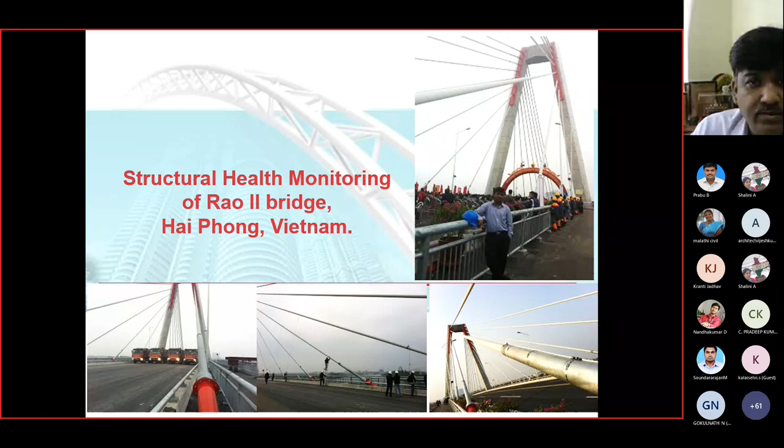Now, a few of the projects I've been involved in the earlier days are the structural health monitoring of Rao II Bridge in Vietnam, and the online monitoring for the Golden Horn Bay crossing in Russia.

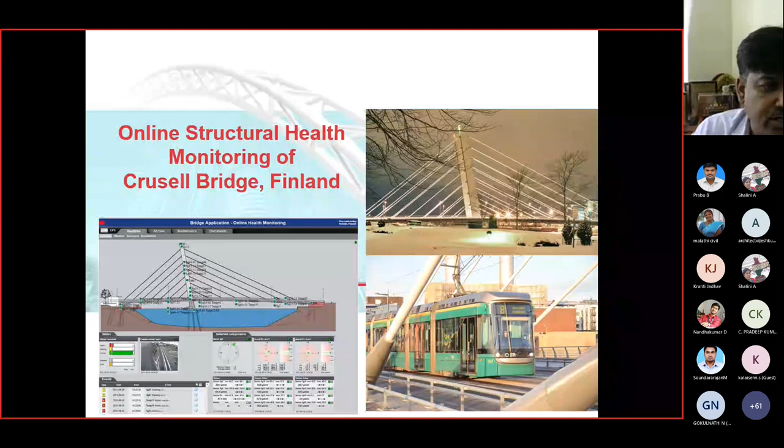Then online monitoring of the Neva Cable Stay Bridge in St. Petersburg, Russia, and the new Mariinsky Theater in St. Petersburg, Russia, one of the largest theaters. And the online structural health monitoring of a Crusell bridge, which I will try to present today as a case study if time permits.

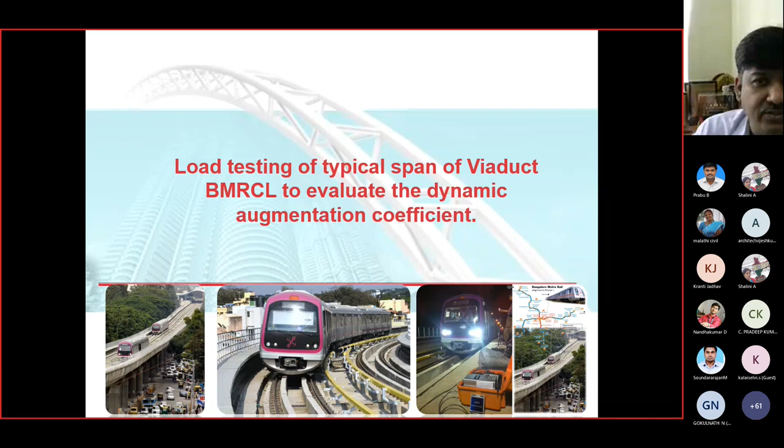Then some load testings have been conducted in various bridges, and a few to name is the viaduct of BMRCL, to evaluate the dynamic augmentation coefficient.

Then the vibration monitoring of various industrial buildings for various reasons, only a few quite interesting to present, to develop the business as well as be knowledgeable about where things would fail. So I've taken only a few. This is vibration monitoring of an industrial building.

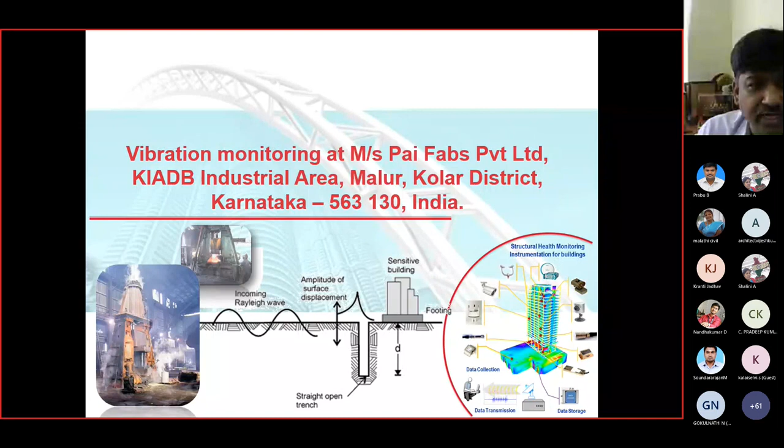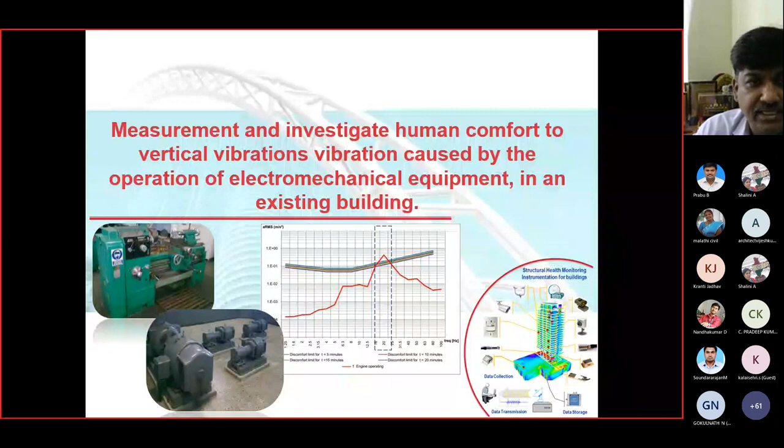And some studies which we have supported indirectly or subcontracted, on the measurement and investigation of human comfort to vertical vibrations caused by electromechanical equipment for various buildings. This is one of the case studies that is quite interesting.

Then we have done a lot of support to research candidates who would like to do research on something related to sensors and sensor-based vibration damage detection techniques, that is forced and free vibration of latex modified fiber reinforced prestressed sleepers, which we conducted at Bangalore University, where we were the supporting team.

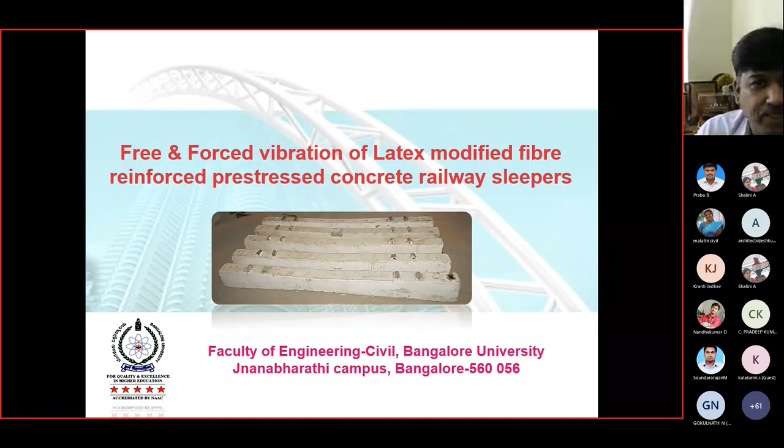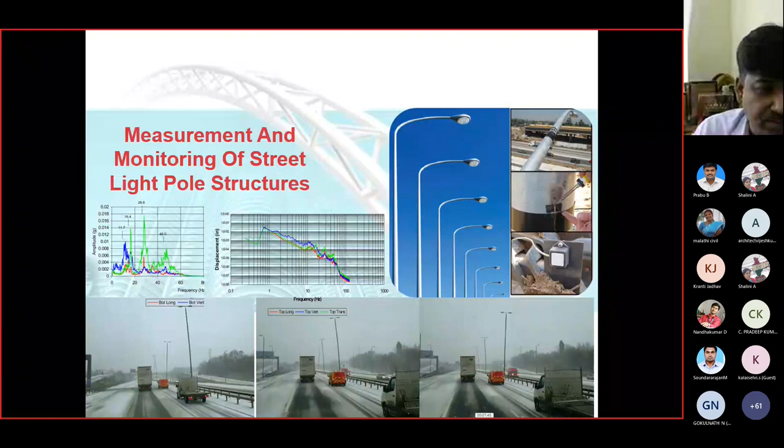We have done a lot of block tests on soil properties to understand the dynamic properties of soil. We have done block vibration tests and various studies on the measurement of street pole vibration, because this is quite a good business in various countries. So we have done street pole vibration analysis for various clients.

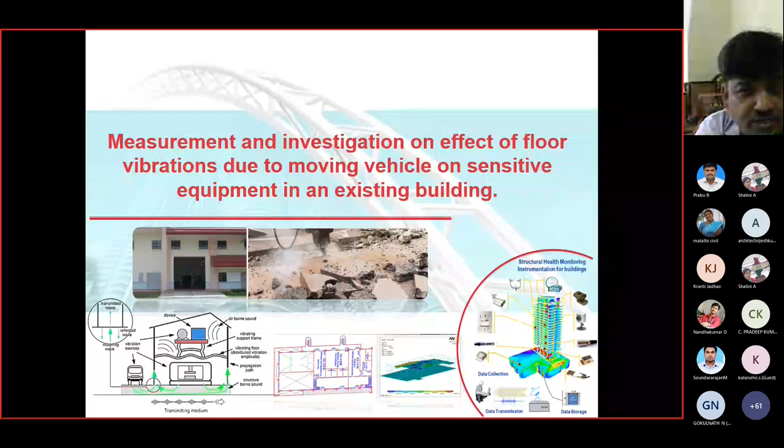We have also done studies on the effect of floor vibration due to moving vehicles because of ongoing construction. So, having provided just a few glimpses of previous projects I was involved in, I'll be happy to share my experience and knowledge, not just limited to this presentation, which I'm going to present right away.

Now, the topic of my today's presentation is structural monitoring and Internet of Things in the construction industry, or civil engineering.

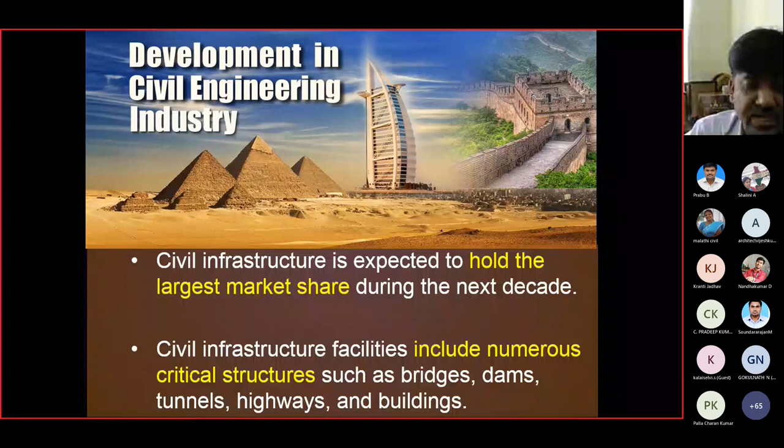Generally what we call civil infrastructure includes all those facilities, or critical structures, such as bridges, dams, tunnels, highways, and buildings.

In the construction industry or civil engineering, the status today is that due to rapid urbanization, there is a necessity for new construction, and for those structures that already exist, they need to be retrofitted.

So we have new infrastructure and we have aging infrastructure.

As we all know, present day structures and recent developments in construction technology have enabled the construction of modern structures, consisting of modern, complex design.

It includes complex geometry and conditions, and incorporates complex systems such as control devices and composites.

Composites are extensively used in the present day, and control devices have already started being implemented even in India.

It is built with advanced materials. We are going as close as 100 MPa, and performance and durability are always taken care of.

We are supported with more sophisticated analysis and design, and also with rapid construction methodology. We are able to raise buildings in a week's time.

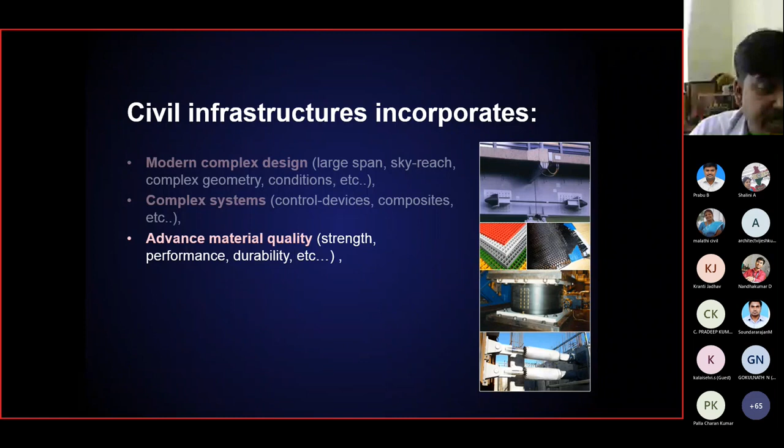So it's quite a complex situation, and these structures are subjected to what is called aging, as well as accommodating the more loads and volumes and uncertainties that are present, and these structures are subjected to various conditions.

Today we are able to reach targets of greater than 1 kilometer tall structures, and spans of more than 2 to 3 kilometers on bridges.

But the deteriorating infrastructure that already exists is deteriorating. This deterioration is a worldwide problem, particularly in developed countries as well as developing countries.

Especially in India, because of various contributing factors over which we could have had control, but due to various reasons, during the pandemic also, we had so many structural disasters happen.

These could have been controlled if we had a proper maintenance regime. If we had had a proper maintenance scheme, I think we would have averted all those disasters that happened.

A very simple example is the Vizag incident - what happened because of the gas leak and how many people died, because there was not proper maintenance.

You can read the report; I've not included those details just to cut short my presentation time, because I had to cover from structural monitoring to IoT and then give you some case studies.

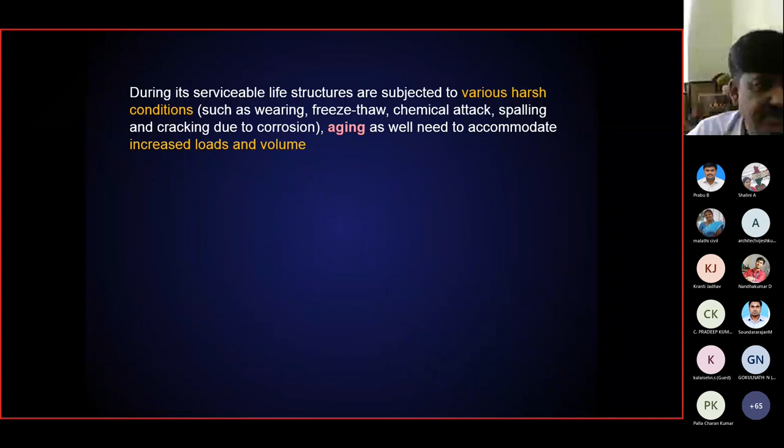Now, structures are designed to sustain load as per the code and standards, and are subjected to aging and harsh conditions.

So now, if you see, initially whenever you construct a structure, you basically design it to a certain capacity.

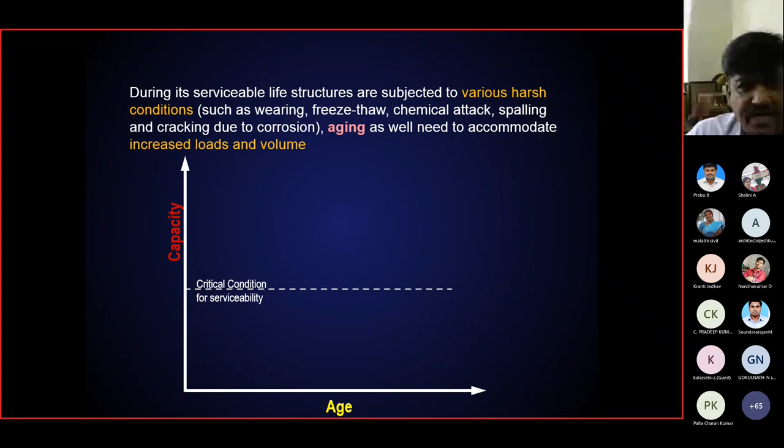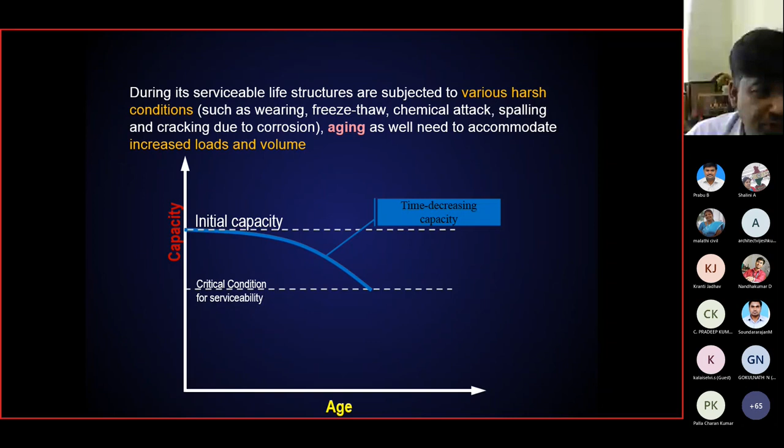Now, it has an initial capacity, and due to time and various factors, it tries to lose its capacity. That means the capacity goes on reducing because of the aging process. And as you all know, it is also subjected to various harsh conditions. Because of that, there is an accelerated deterioration that would take place.

As you all know, the load variation pattern is always varying, and it is always continuously increasing. Although it is varying, it is continuously increasing, and therefore that also contributes to the deterioration of the structure. And since we are dealing with variabilities and uncertainties, the parameters of interest, that is the loads and the capacity, can be best defined by the frequency distribution curve, which is nothing but a probabilistic distribution.

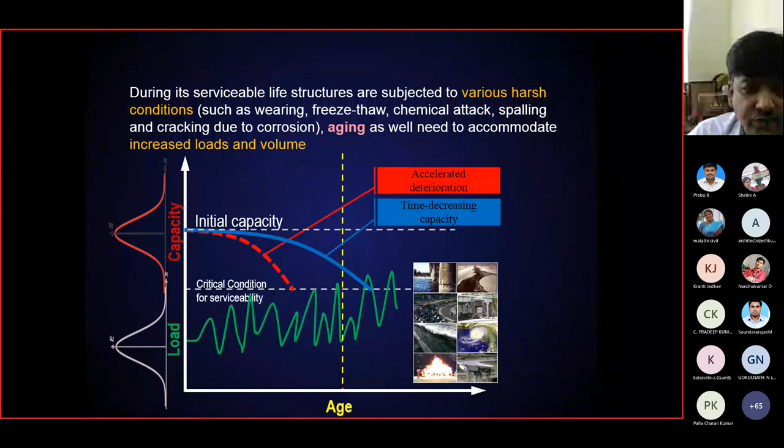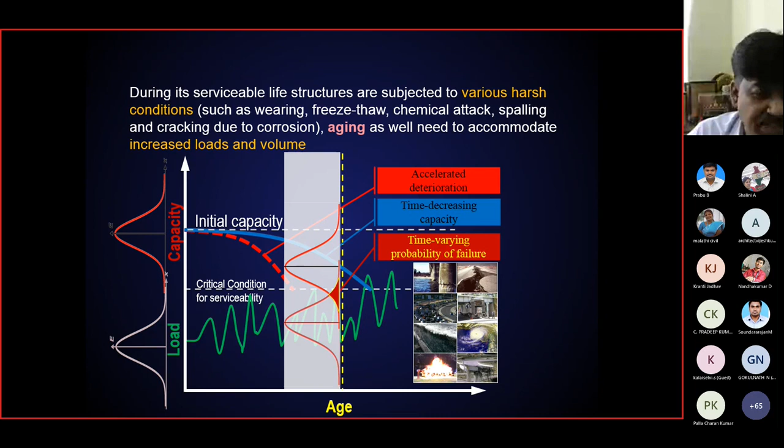As deterioration progresses over a period of time, if you see the yellow line, with time the demand exceeds the capacity. So therefore there are chances of failure. Because of the demand exceeding the capacity, it is evident that the time varying probability of failure increases. As we all know, the design must guarantee the performance, that is functionality, strength, and durability.

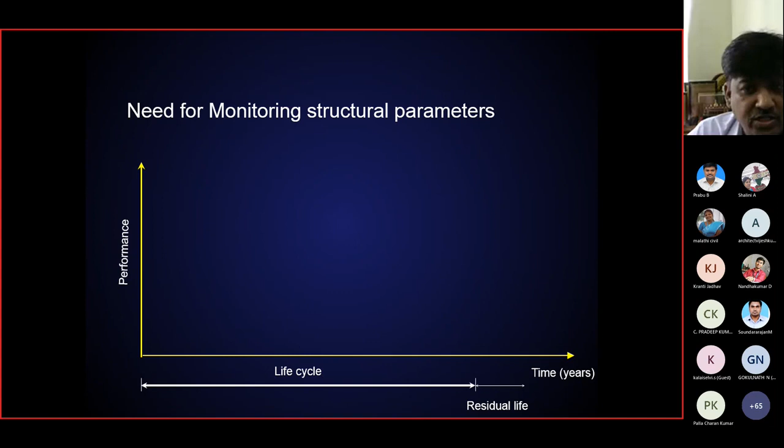Now, structures in general are intended to perform safely during the design period, and you know that we call it the life cycle, the complete life cycle. When it enters its service, basically when you see this slide, I'll point with the laser. When it enters the design life, or it starts performing, or when it is designed, it is initially at its perfect state, in good agreement with the engineer's expectation of the day.

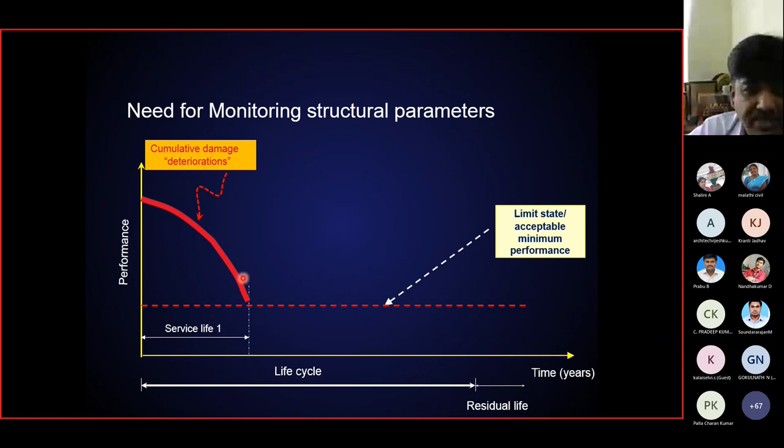Over the period of time, the structure loses part of its initial capacity. Then when the structure is found to reach a limit of acceptable minimum performance, it undergoes a repair to recover its initial capacity. Now, if it is neglected during this process, you may see further progress in the deterioration, and it would lead to various further failures.

As you all know, once in a design life, it has to be subjected to some type of extreme event like an earthquake or a tornado. Once it has undergone some type of accidental loads, we call for an investigation, and further, if required, we need to retrofit after the extreme event. The same cycle repeats, meaning after the retrofitting, the deterioration process continues.

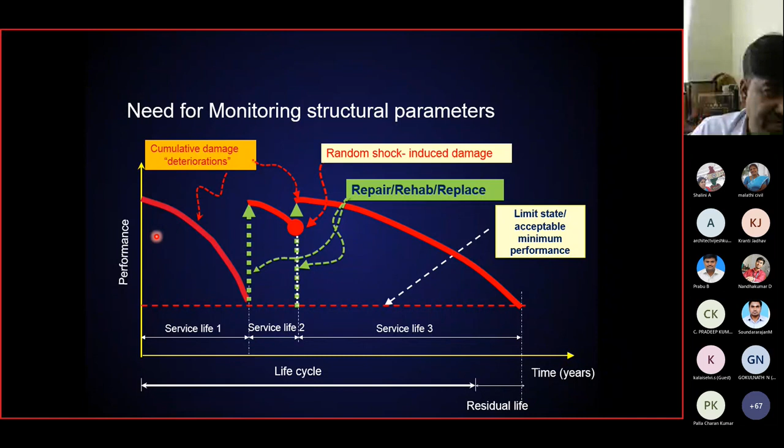What you have to notice here is, based on this, a structure that is initially designed deteriorates over a period of time, and once it is inspected, it is also retrofitted. Then in a lifetime it will be subjected to some random event, and after the event, if there is a possibility of inspection, there is a possibility of retrofitting, and further it starts deteriorating.

Now what is interesting is, what is more uncertain is the time at which the structure starts deteriorating. So we are not aware at what time the deterioration will take place, and at what point we should start looking into the structure or inspecting it.

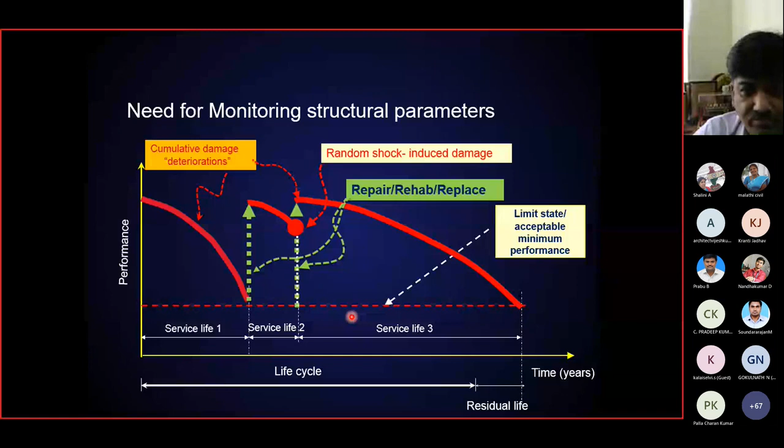The rate of change of this deterioration is not clear, because the X parameter and Y parameter, that is what the capacity is, what time it starts, up to what point it will deteriorate, and the rate at which it is deteriorating, is all uncertain. In order to have exact knowledge of how these things are working, we need to go for a probabilistic approach, which is dependent on data and information.

Now, reactive-based maintenance is basically still a reality in civil engineering, and it's still being practiced even in developing and developed countries. But the preventive approach, that is the time-based and condition-based maintenance, is still not often practiced. But present day, what is required and the technology available can also give us the chance to get into the predictive or forecasting-based method of maintenance.

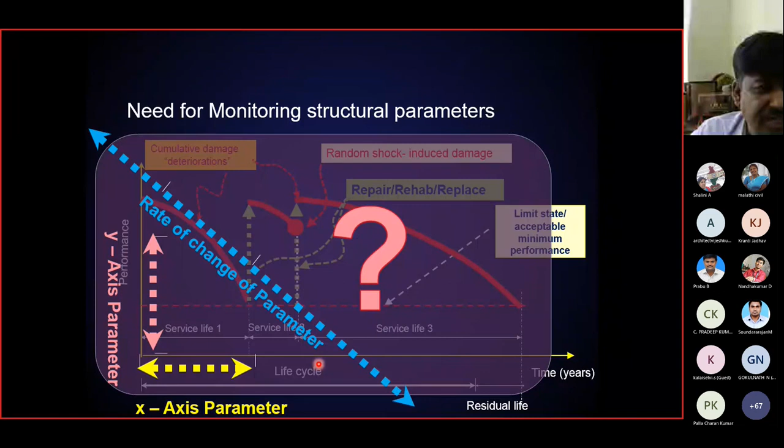So we have various questions here: at what time it is going to deteriorate, when to start maintaining, when to start retrofitting, how much it is retrofitted, and at what rate it is deteriorating after retrofitting—a lot of parameters are involved. For understanding it better, we need a probabilistic approach, and for that, we need lots and lots of data.

In general, civil infrastructures are subject to various conditions - aging, increasing demand, aggressive environment, and other factors - which lead to damage and deterioration. If we have inadequate performance assessment, there are various cases, and I'll give you some examples in later presentations. The I-35 bridge is one great example, where inadequate performance assessment led to decreasing capacity, increasing risk of failure, and ultimately the failure of the system.

As an engineer's problem, obtaining reliable data is always the first and fundamental step of finding a solution. We need more information, and from more information we get more knowledge, and from knowledge we can understand failures and how structures behave. Therefore, failures and their analysis will lead to insight and improve the design of structures we're looking into, or future structures we're going to design.

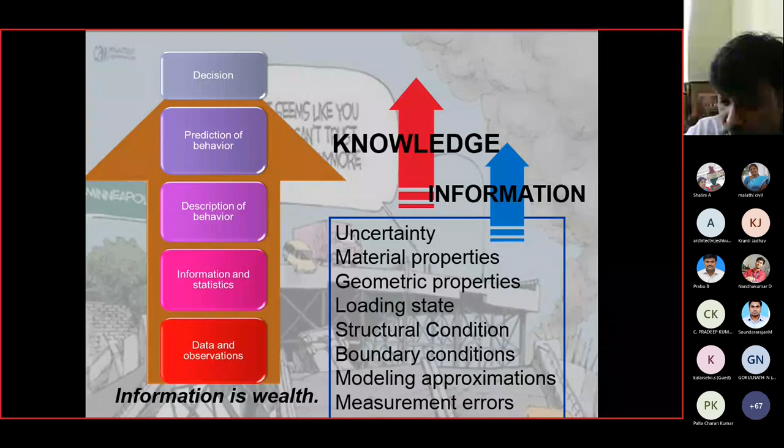In most experiments or experiences, certain quantities are measured, and then other quantities are determined from the measured data. We do experimentation or get data from various sources. Associated with each of these measurements, we have measured uncertainties. When a final result is determined from measured quantities that have uncertainties, that will also result in uncertain results, or lead to uncertainty even in the desired result.

So whatever you're looking for, because of these possibilities of uncertainty getting into the measured parameters, your results are also uncertain - uncertainty in the derived results. The procedure by which experimenters or researchers determine the uncertainty in the final result from measured uncertainty is basically called error analysis or the propagation of uncertainty.

If you're making a measurement in the present, the uncertainty also increases over a period of time, and in the distant future, this uncertainty is going to be quite high. Because of this uncertainty involved, the derived result also has the highest possibility of uncertainty, and the propagation of uncertainty becomes clearer over a period of time.

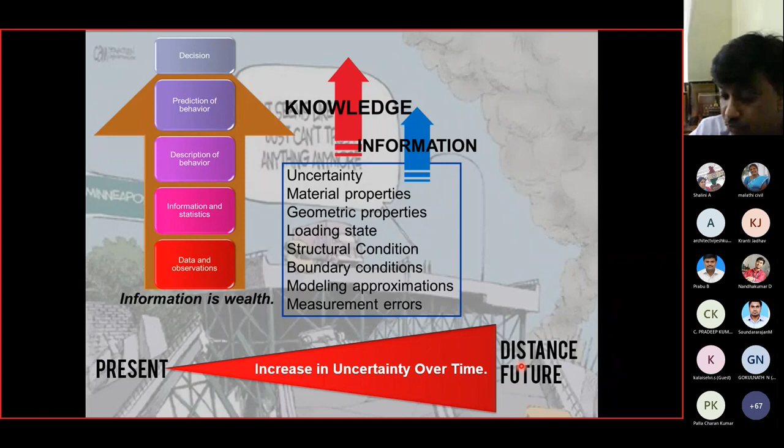In the present day, structural health monitoring of civil infrastructure is being accepted by the majority in civil engineering fraternity as the potential method for assessing the condition of the structure. Monitoring using sensor technology is the way to get quantitative data about our structure and help us take into account the data, convert that to information, and take informed decisions about the health and destiny of that particular structure.

Basically, the objective of this health monitoring is lowering the maintenance cost and increasing the reliability of the structure by using those data. And those data also have the possibility of uncertainty, because of the propagation of uncertainty - you're taking the measurement at that time with the uncertainties and you're taking a measured action. Therefore, it could help in the design of a new structure as well as an existing structure.

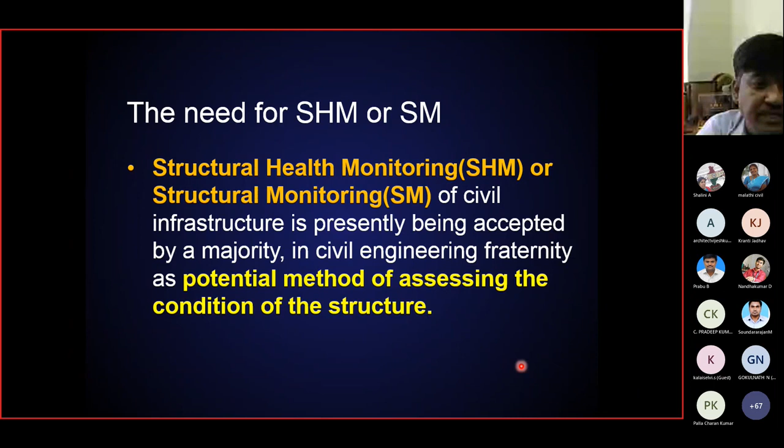The development and implementation of structural monitoring for surveillance, evaluation, and assessment of existing and newly built civil infrastructure has attained some degree of maturity. That means we have already implemented it. There are various countries that have extensively used structural health monitoring.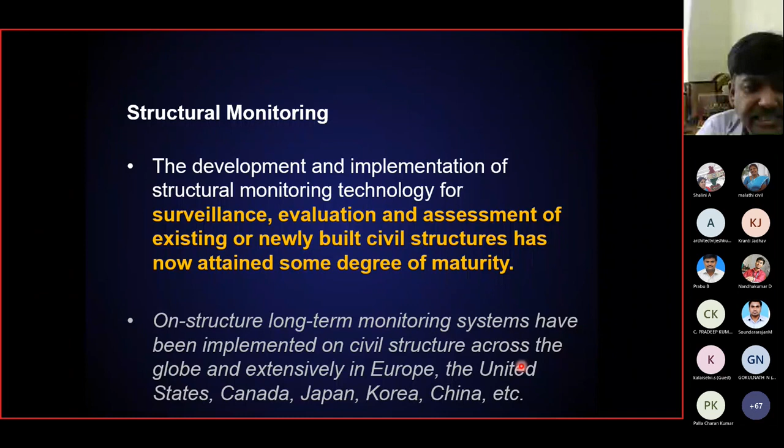I was also one of the key members in marketing as well as in developing as a development scientist, and as well as the manager for a department for this particular business. So it has been completely implemented in various advanced countries, and as well as in a few cases in India, although it's not fully recorded. But you can see this is presently being implemented, and in research also we have attained some degree of maturity in civil engineering.

For people who are new to this technology, structural monitoring is similar to that of a doctor. Today's engineers are able to continuously monitor the prevailing condition of the structure. Because uncertainties are involved, continuous monitoring is the present trend, and sometimes periodic monitoring can be done if you have certain health issues.

Similarly, the bridge can also be monitored at certain intervals. So basically, health monitoring is a prediction of the ability of a system to survive or check the performance requirement in the future also.

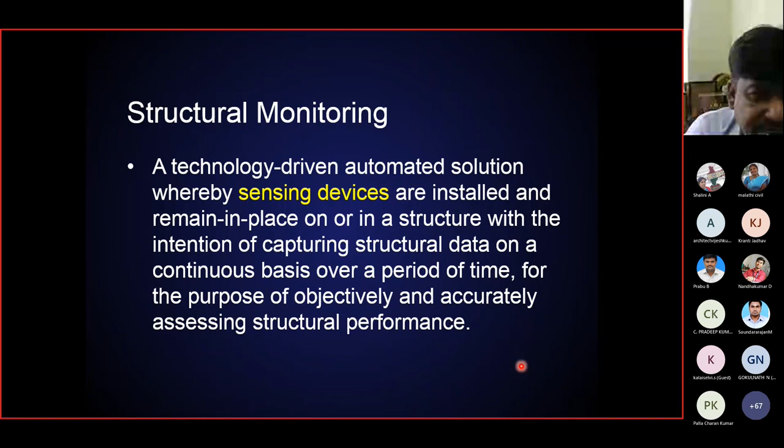Now let's look into some of the core definitions, components, classification, and benefits of structural monitoring. We can define structural monitoring or structural health monitoring as a technology-driven automated solution whereby sensing devices are installed and remain in place on or in the structure with the intention of capturing structural data on a continuous basis over a period of time, for the purpose of objectively and accurately assessing the structural performance. This is the right definition, and it encompasses various things which I've already introduced.

I hope this definition helps you understand what structural monitoring is. Structural health monitoring is basically a combination of civionics, that is structural engineering, electronics, and data science. Civionics is a term coined in 2003, referring to the application of electronics in civil infrastructure or civil engineering.

Monitoring was applied for usage monitoring, health monitoring, quality verification, or maintenance monitoring—that is, reactive, proactive, corrective, preventive, and predictive maintenance. So these monitorings were extensively used for various purposes.

While most engineers will agree on the definition of structure, the monitoring purposes were many, and the word 'health' had different connotations and meanings—it meant differently for different people. To counter this problem, many practitioners today who work in health monitoring try to simply avoid the word health and refer to it as structural monitoring instead, to avoid confusion. This is well documented, and you can check it out; there's a lot of debate about why this decision could be a good one.

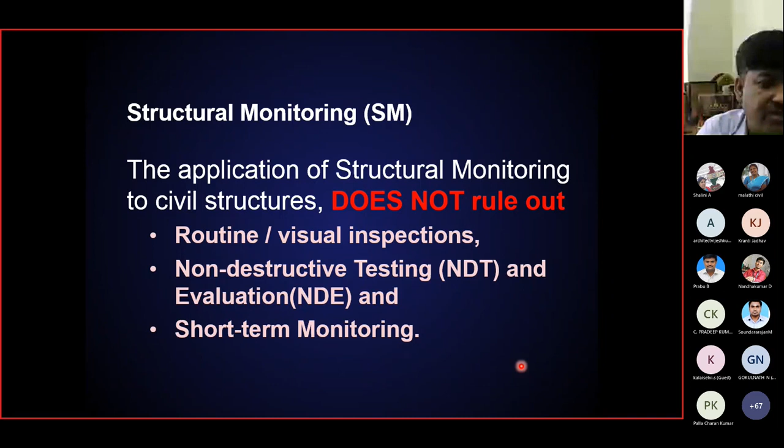Now, the application of structural monitoring to civil infrastructure does not rule out routine inspection, visual inspection, NDTs (non-destructive evaluation), and short-term monitoring. Most of the time, when I was involved in projects, I've seen engineers expect that once we install some monitoring scheme, the system should perform well and give a complete report on the health of the structure. But that is not so—it also includes all the other routine things done for damage assessment and retrofitting schemes.

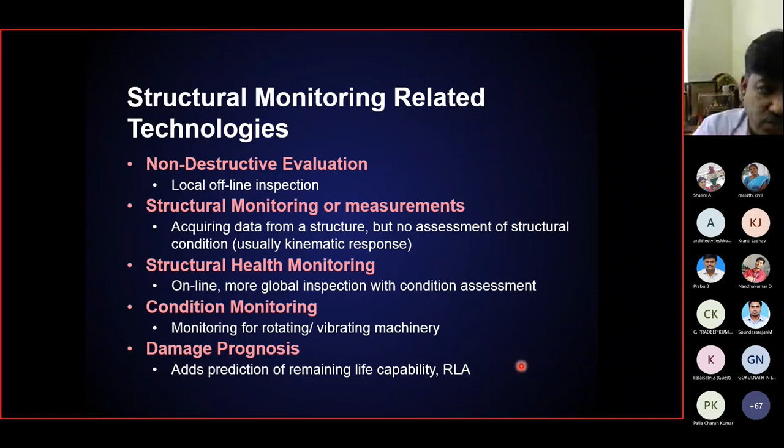Now, the structural monitoring related terminologies used in various domains, as well as in civil engineering, include non-destructive evaluation, and it could also mean structural monitoring or measurement, structural health monitoring, condition monitoring, or damage prognosis. So the same word, structural monitoring, can encompass all these streams. That means if you're reading any document related to non-destructive evaluation, it falls into the category of structural monitoring. If you're working on condition monitoring or damage prognosis, that also falls into the category of structural monitoring.

Each monitoring project presents its own peculiarities, and although it's possible to standardize most elements of a structural monitoring system, each application is unique in its own way.

Basically, you can classify the monitoring of civil infrastructure according to several categories and subcategories based on the type of monitoring. That is, you can have scheduled monitoring based on time schedule, sampling rate, the objects, the phenomena, instrumentation, and response.

So if you're going for a particular bridge and trying to monitor only the stresses on it, you'd call it structural monitoring, or bridge monitoring of stresses of a bridge. Using these classifications, you can combine them to classify or categorize a particular monitoring scheme. For example, if we're continuously monitoring a bridge, we can call it continuous monitoring of a bridge.

If you're monitoring a bridge, or a particular pier structure in that bridge, you could say: continuous monitoring of a pier structure subjected to various deformations using optical sensors and finding its dynamic response.

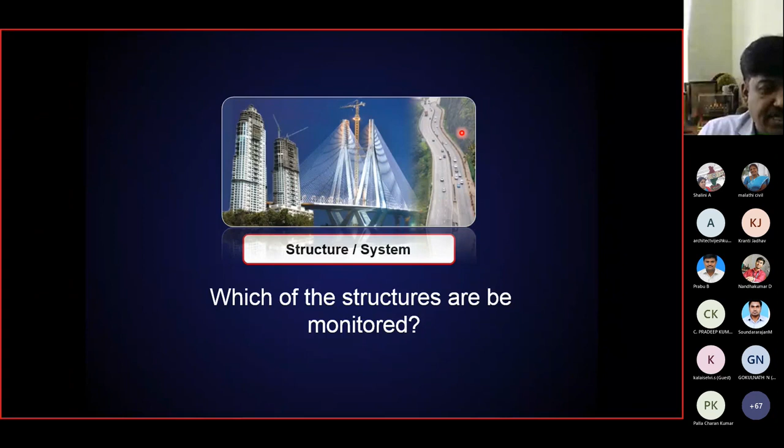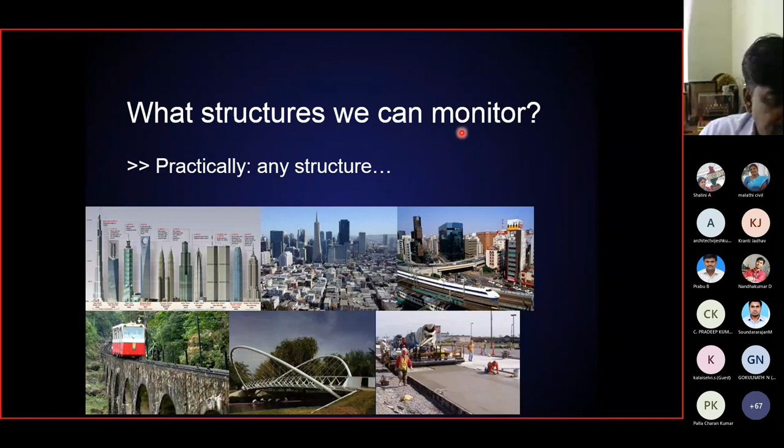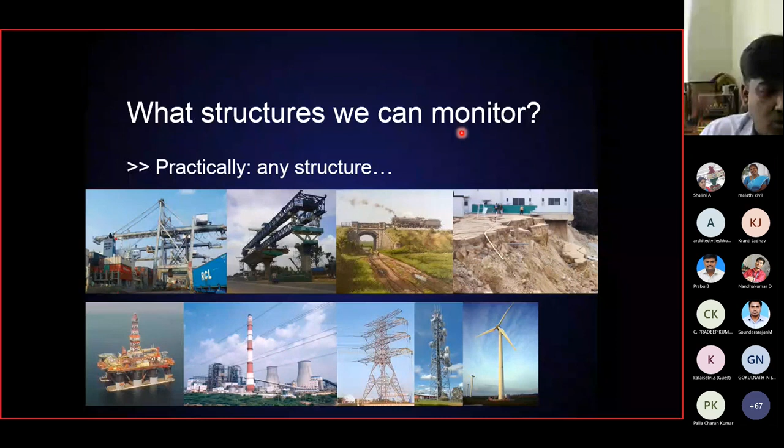So therefore, the first question that any engineer will have is which structures are to be monitored. Practically, we can measure or monitor any structure. It could be old, it could be new, it could be one particular system, it could be a number of systems connected to each other, or it could be the whole city. It could be temporary or permanent, offline or online, offshore or onshore, and any type of well-connected grid system also. You can have a massive structure, a tall structure, a long structure, or massive structures.

Now, the next question that would fall in place is that once you know any structure can be monitored, whether it is micro level or macro level, whether it is on sun, moon, earth, anywhere, we can monitor these structures. So next is when and what stage these structures need to be measured or monitored.

As you all know, just as a doctor is able to monitor the prevailing condition of a human at any time - if in case you are in the happiest moment to the saddest moment, you are in a panic stage, or a distress stage, or an extreme stage also, you go for an examination, and then you are given diagnostics, and then you are given remedial measures. Similarly, when it comes to monitoring, we have the phases of life of the man as well as the structure. You can monitor at any point, that is from birth to death. We can monitor - that is birth monitoring, as you see in medical science. Here it is process monitoring. Health checkup is nothing but operational monitoring, and then construction monitoring. And when it comes to some type of illness or critical issues, we have clinical monitoring, here you can say that is critical monitoring also. So therefore you can see the parallelism between the medical activity and the structural health monitoring business.

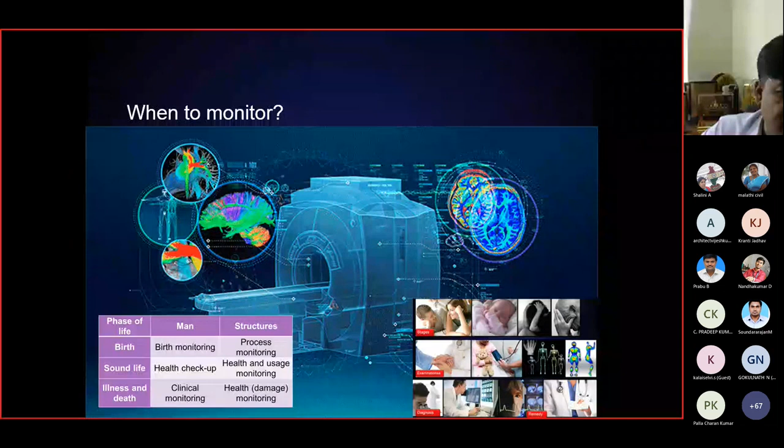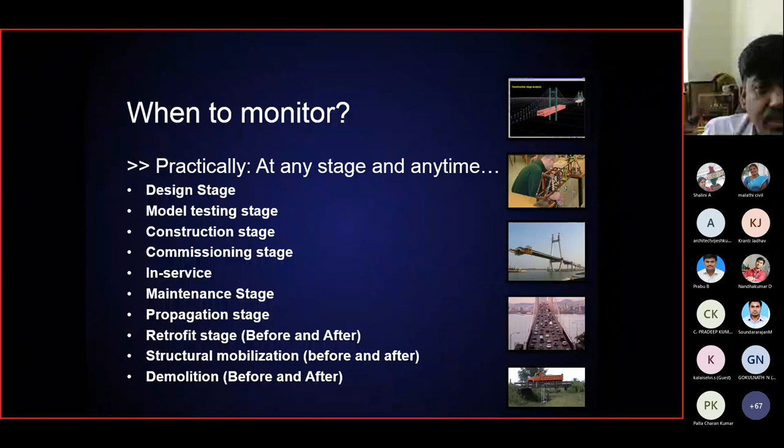We try to monitor before a demolition takes place and after, regarding the adjacent structures or adjacent surroundings. So basically, we can implement monitoring across the entire lifespan of a structure from beginning to end. At various stages, we try to plug in some monitoring scheme. We have a new name to it - as I said, you can have various combinations of what we categorize, and then define your structural monitoring scheme for a project.

So you have a specific reason to do this monitoring, and there are particular schemes which are continuous monitoring, from the starting day to the ending day. Most projects that have been undertaken are on continuous monitoring, as well as a few projects on load testing and diagnostics, just to check what is happening with the damage or why it is getting damaged, and a few for retrofit evaluation techniques.

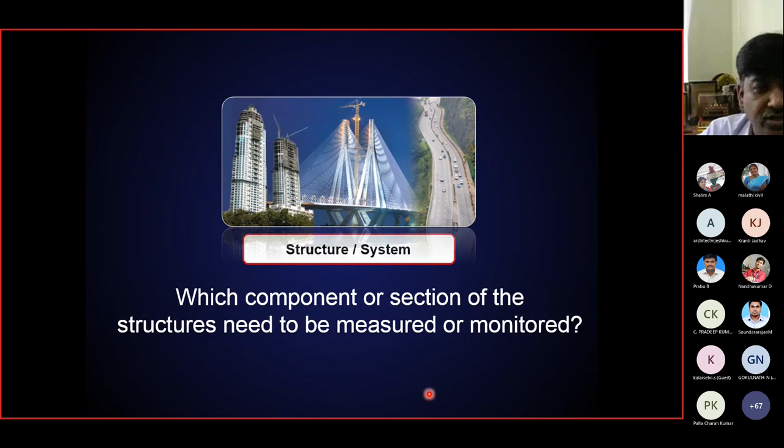Now, which components or sections of the structure can be measured is the next question. Now we have understood what type of structures we can monitor and when to monitor, and now we are looking into what type of structure, which particular section of the structure to be monitored. Either you can go for the whole structure to be monitored, or you can take one particular portion of a structure to be monitored - you call it global monitoring and local monitoring.

If in case you have some specific conditions wherein you want to take a look at what is happening at a particular point, you can go for local monitoring. If you want to know what is really happening in the whole structure at the global level, you can go for global monitoring.

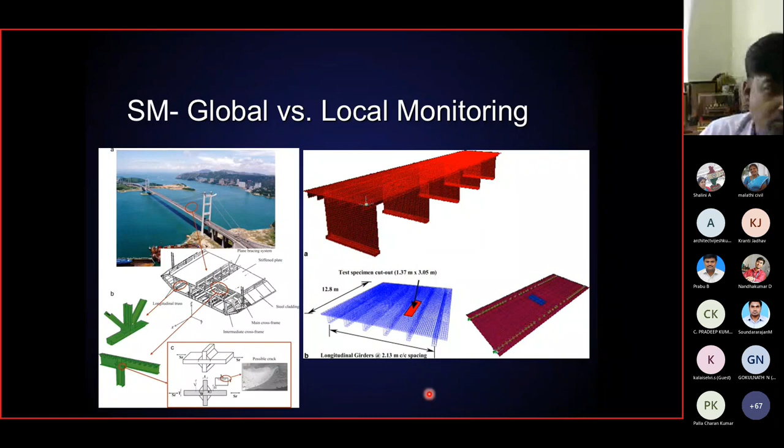Now the next is a sensor. That's a very prime important component of the whole scheme, which is nothing but the sensor, and it's a first level device which collects a response of what you want to measure. So what is a sensor - first is that question, and next is the type of sensors that are available. Now, if you look into the general textbook definition, in general, a sensor is a device for sensing the physical variable of a physical system or an environment.

If you want to be very specific, you can refer to the Institute of Electrical and Electronics Engineers, which gives a formal definition: a sensor is an electronic device that produces electrical, optical, or digital data derived from a physical condition or event. Data produced from a sensor is electronically transferred by analog devices into informed output useful for decision making by an intelligent device or individual. This is the definition given for the present day sensor.

Whenever you look at sensing devices, there are various words you'll come across. The first is the sensor, the next is the actuator. The technology that complements a sensor is the actuator, a device that converts an electrical signal into actions, often by converting signals into non-electrical energy such as motion.

When doing health monitoring, the first thing you choose is the sensor. When you get into the market or talk to electronics experts, they give you definitions. In the initial days I had these issues, even today, because I'm not an electronics person, I'm a structural engineer. So there'll be certain things we won't be knowing, and it's better to understand a few things beforehand before getting into this business.

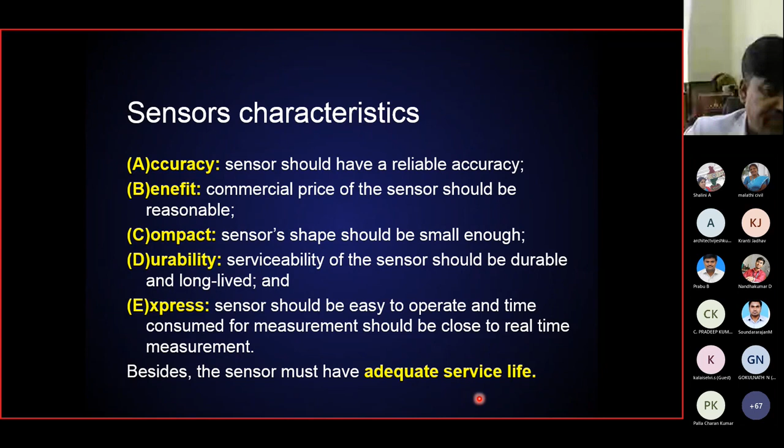D is durability, meaning serviceability of the sensor during the pouring of concrete as well as during the service lifespan of the structure, which is almost about 100 years. And E is express, meaning the sensor needs to operate in terms of seconds and milliseconds, with measurement in real time. There should be no lag between when it is recording and when it is transmitting. This monitoring rate should be quite high, and that's what we call express. Besides that, it must have an adequate service life for us to implement it in any civil infrastructure.

Now, the next thing you should note is that sensors cannot measure damage. This is very, very important.

In most of the cases I've been into, people ask, once we put a sensor, can we see the damage? You cannot look at the damage the moment you put the sensor into it. But these sensors sense the changes in the physical variable of a physical system that you are interested in.

Let's say you have a building and you're interested in the strain parameter. This is the physical variable that you're interested in on that particular structure or environment that could lead to damage. The strain parameter is going to be affected by temperature, so you would measure strain as well as temperature on the structure. You try to sense how the strain is changing with respect to temperature, and if the straining is happening, you know there is some change happening to the structure. So you basically collect information in context.

The information is in context of which the data is taken. So if you want strain, you would look into the strain data, in context with how it's been taken. So sensors basically don't measure damage, but rather measure the change in the physical variable of a physical system or environment that could lead to damage. So this is the right point for us to understand what damage actually is.

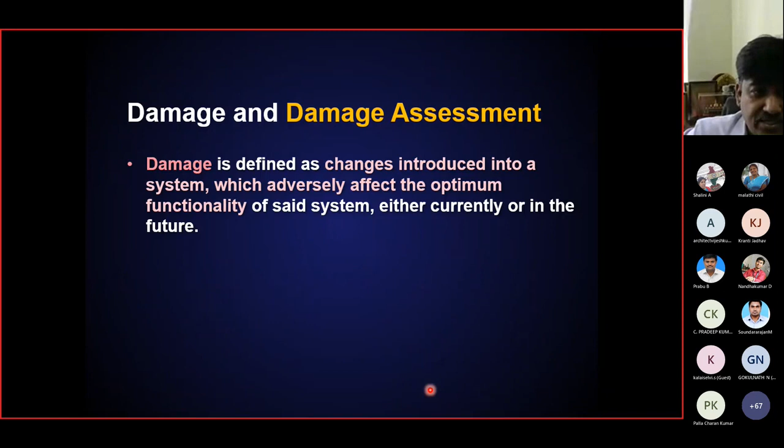The damage can also be on a temporal scale, meaning it is time dependent. Over a period of time, the damage would propagate. So damage can happen at any point in space and in time. Any change introduced into the system, whether because of time, space, or any other condition, that adversely affects optimum functionality, you call the structure damaged.

Now, damage is not meaningful without a comparison. If I want to know whether the system is damaged or not, I need to compare between some stage and the previous stage. So I get to know whether the structure is performing as before or not. So damage is not meaningful without a comparison between states, the initial stage and the other stage, the second stage.

Generally we talk about the initial stage, the undamaged stage, and the damaged stage - before and after. That's the best point for comparison. Now damage assessment basically...

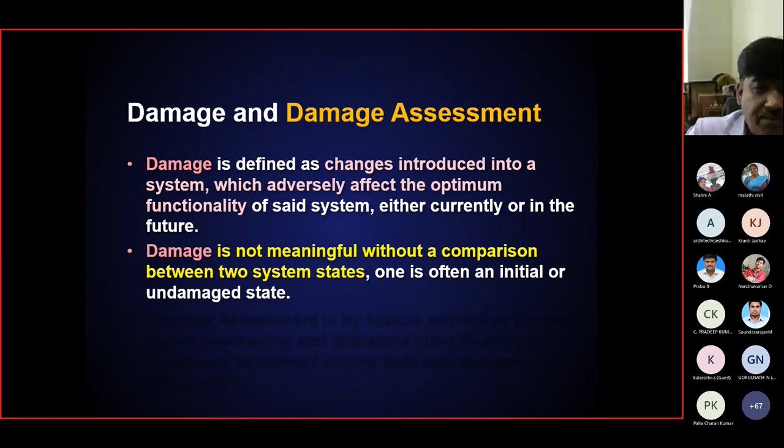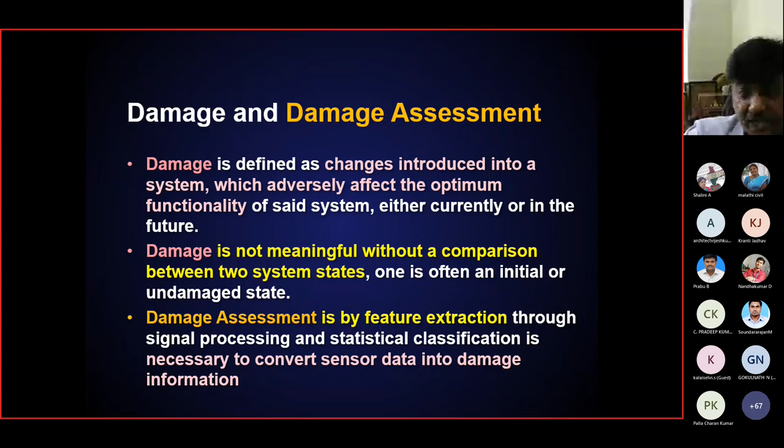Damage assessment is done by feature extraction. Whenever you want to see whether the structure is damaged or not, we take the data, look into it, and see the features in the data, through signal processing and statistical classification. So we convert the sensor data into damage information. If you put a sensor onto a structure, it doesn't measure damage directly - you need to do the damage assessment, look into the features or statistics of the data, and convert that data into damage information to know the state of the damage. So what are the different types of sensors available?

If you go to market and talk to sensor experts, these days there are open markets. Earlier, we needed to look out for sensor providers and discuss with them to develop a sensor, but these days it's openly available. You can just define your requirement, and the sensor experts will give you what is required for your particular application.

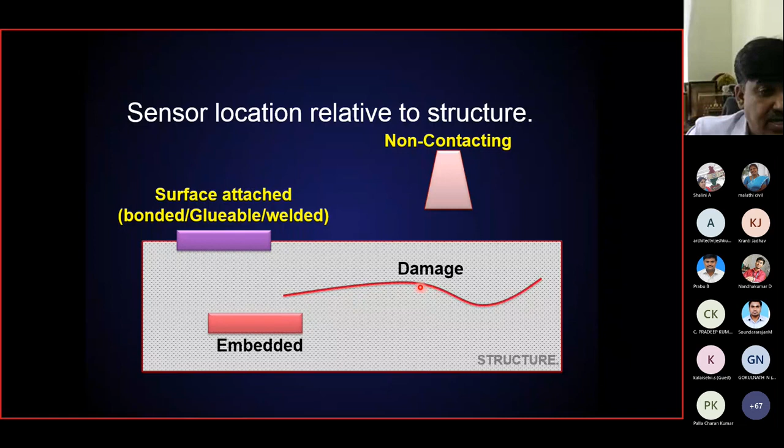Basically, sensors can be defined based on their location relative to the structure. We call these non-contact sensors, embedded sensors, and surface-attached sensors. There are various names you can use, and sensors can be embedded at a particular location for damage detection, or embedded between composite layers. So we call it non-contact, contact or surface-attached, and damage or embedded sensors.

As well, conventional electrical or electronic based sensors come in various types - surface bonded, glued, welded, clamped, bolted, concrete embedded, composite embedded, and so on. These days, these are commercially available, with various types of sensors available from various sensor providers. You can look into it - those manufacturers have detailed catalogs with various types of sensors.

You need to be very specific on what type of sensor you are looking for based on your particular case, because I myself have done this in the past. When I started my first project, I made one particular mistake - I used a wrong sensor at the wrong place. Although I had opportunity to correct the data, that was a point that really made me understand the different types of sensors available.

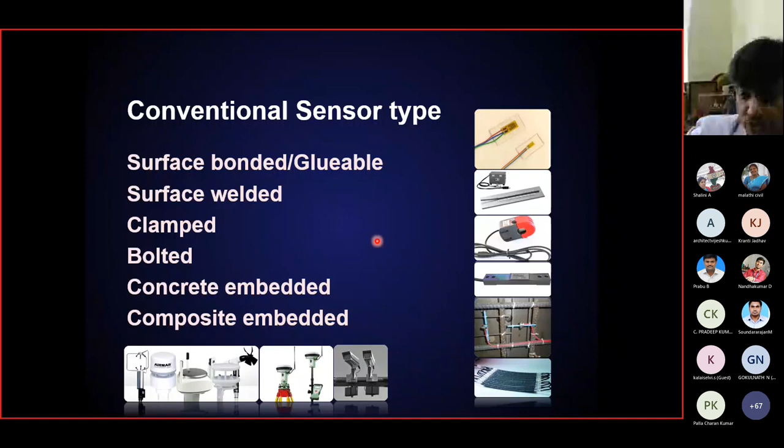Later we needed to fabricate one particular type of system which would perform well with the sensor we already had, because each sensor is very costly. So you have to know what different types of sensors are available in the market, so you don't make the same mistake I did.

Conventional sensor techniques have limitations in evaluating long-term behavior. Whatever we use, conventional electrical or electronic based sensors have some issues - electromagnetic interferences, sensitivity to electrical noise, and these sensors degrade with age. Present day, we have a solution for that also.

If you're going for long-term monitoring, fiber optic sensors are identified as most suitable for health monitoring of structures in such cases. But even this has issues, and I have dealt with fiber optics practically. I think there's been a lot of development in recent days, and I hope it's being addressed by experts in this field.

The advantages of fiber optic sensors include complete immunity to electromagnetic interferences, lightweight, and very small size. Most of you know this - nowadays telephone lines are also fiber optics, and data networking is also by fiber optics, and you know the speed at which we're dealing with.

Fiber optics have very low losses, high temperature and radiation tolerances, stability and durability against harsh environments, no local electrical power required at measurement points, high resolution, large bandwidth of signals, and high sensitivity. That's why online programming is so effective, because they're using fiber nets these days, and this is a big market.

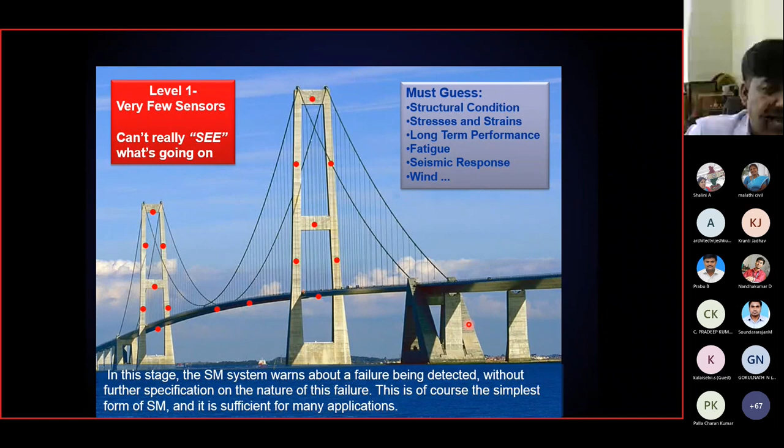You go for level 1, where you plug in some sensors at a critical location and get to know what is really happening at that point, and whether the structure is getting into some damage state. That's one thing, but you can also get into many more things.

But there are projects where there are a lot of sensors that are non-functional. There are also projects with a lot of functional sensors that get enormous data, but they don't know what to do with that data.

So the larger the classification or monitoring scheme, the more sophisticated the scheme is going to be. As we saw in the previous slide, the level 1 system is the simplest, cost effective, and affordable by most. Level 4, as we're looking at in this slide, is the most complex and costly class.

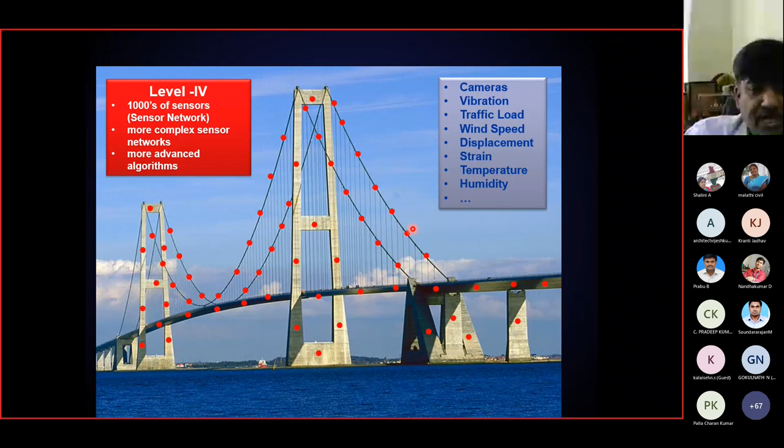So although we have the capability to plug in lots of sensors, the amount of data analysis that needs to be done is going to be more complex.

Now the next component is the data acquisition system. The sensors are connected to data acquisition systems.

So in short, the sensors are networked with the data acquisition system where the data are collected and can be retrieved for analysis. Now we have various types of data acquisition systems: portable systems for offline monitoring, fixed data acquisition systems (offline or online), handheld (offline or online), and real time. So basically in the market, you get data loggers, data acquisition devices, and data acquisition systems.

So you need to know about the cost of it. When you're looking at the data logger, it's low to medium; data acquisition device is low to medium; and in case of data acquisition systems in large projects, it's medium to high.

So ease of use for the data logger is very high, whereas for the system it's low. The flexibility is low to medium for the logger, and quite high for the system. Flexibility means the number of sensors you plug in and the number of channels you can increase. Data loggers have very few channels, whereas the system has very high channels.

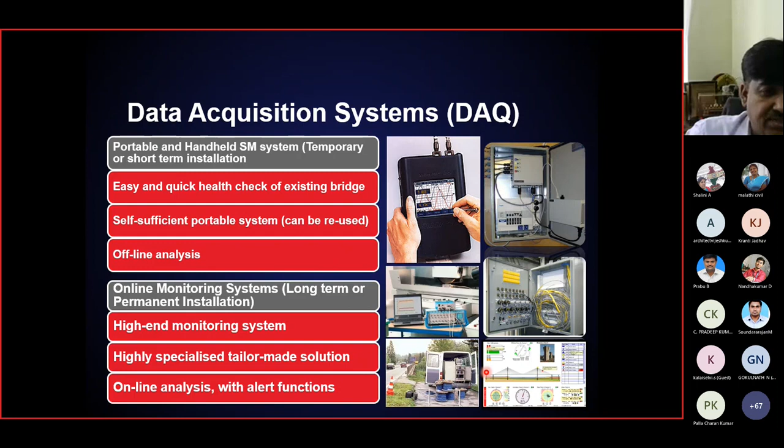There are various advantages and disadvantages of using these two systems, and they're used for specific cases. If you're going with a temporary installation for some type of testing or NDT, you'll go with portable handheld systems. If you're looking for long-term monitoring with analysis or alert systems, you need an online continuous monitoring system that should be permanently installed.

The next is data transfer. How is the data going to be transferred - whether it's going to be stored locally or transferred remotely - that's the next question.

The data collected from the sensors can follow various schemes. One is a centralized data acquisition system with a parallel connection, but this type of connection can be tedious, because you have more cables coming in.

In one of the projects, I had 20 sensors on a small bridge only about 8 meters long, and we were doing the monitoring scheme for that - you can imagine the number of cables that ran. There are projects where the cable weight was quite high, so you can think of these cables as one of the prime issues. The parallel system has this problem of more cables running from each sensor to the data system.

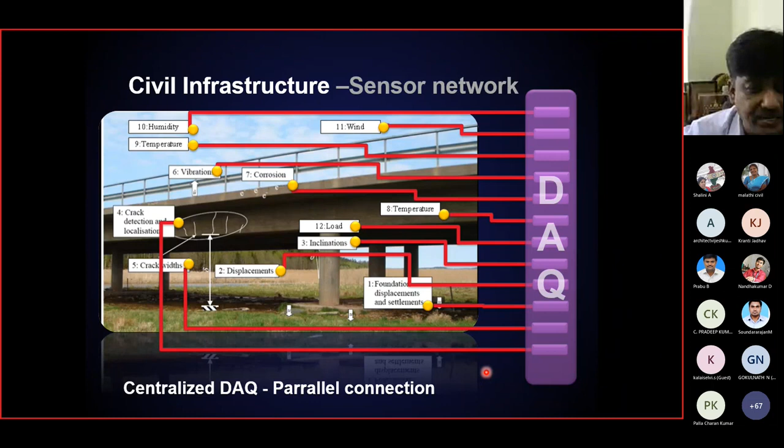But a later development was the distributed data system, wherein we had a series system. I was also involved in the development of such a system progressively, giving my inputs over a period of time, and this has helped a lot. That means all the sensors are connected in series, but it has its own advantages and disadvantages.

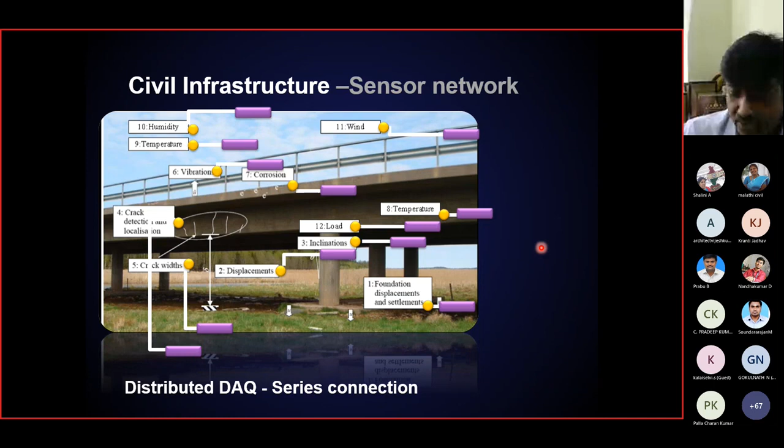With the parallel system, if one sensor fails, there's no issue. But in the series system, if the main wire cable cuts, the whole system stops. So that's the main disadvantage.

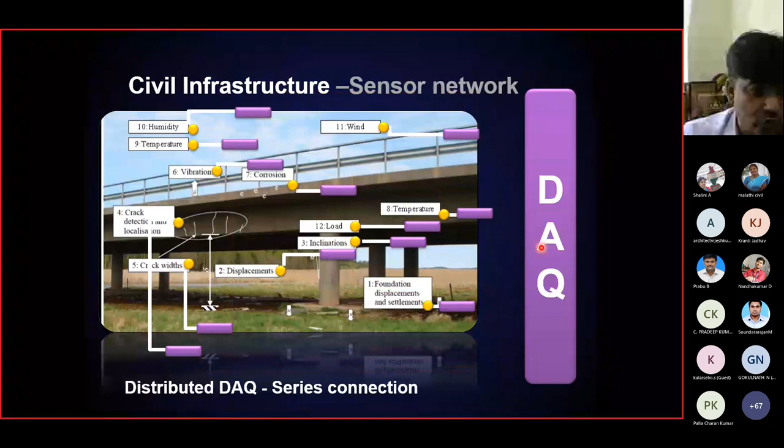These days we are going with the distributed data system, which has discrete wireless connections sending the data. There are various networking schemes - wired as well as wireless networks, LANs and WANs, fully wired systems, distributed sensor networks, and fully wireless network systems. These are extensively used in various products.

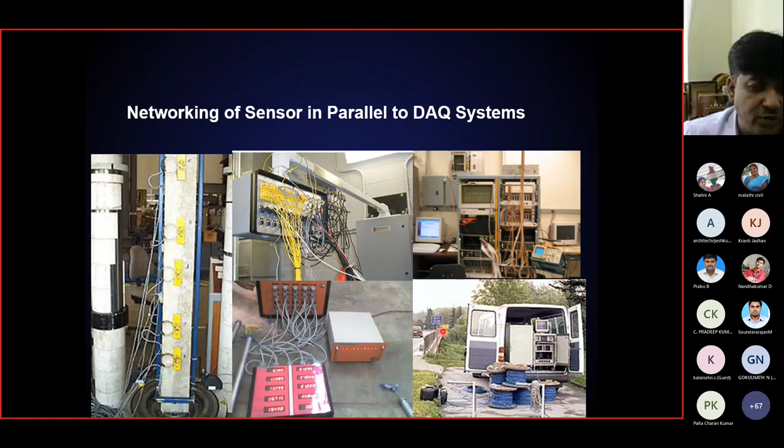This is the present day trend in the labs, in the office, and in the field. Although my presentation looks neat, when you get into the labs, you see the present day conditions - so many wires and so many systems that are pretty huge, and that needs to be moved onto the bridge to collect the information.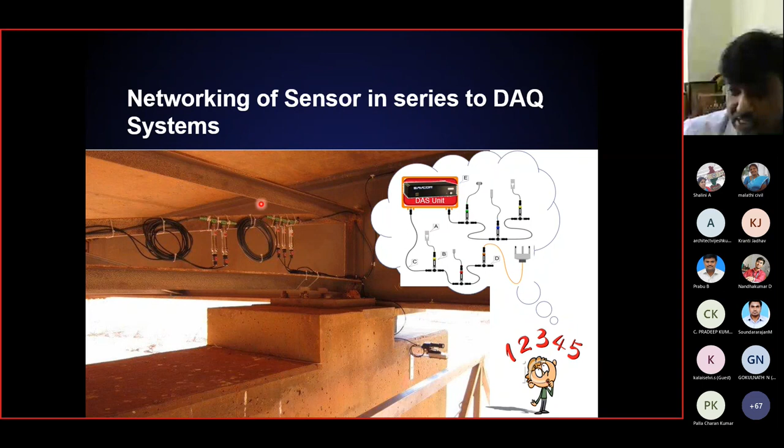You can see here there's one single wire that is moving, and you can see there are multiple sensors coming out of the single wire. So this is the single network system, quite inspired by the fiber optic sensors.

You can see the fiber optic sensors that could run on the bridge. One single strand can run, and you can have a number of sensors on it, with a limited number of sensors over it on a single strand. Therefore, this is also a series system, and this is extensively used even on the field.

I'm just giving you an explanation on the different types of sensors that are available that can be used. So basically you can see here it's a single strand, that is the fiber optics, moving all over this particular block and trying to monitor the strain.

You can see this is the extensometer, and basically you have a block here. They are seeing how the temperature is varying in this particular block. So these are two sensors, but these are the fiber optics.

So you can see that we have the single cable coming, and then you can see that it is in a series system. The sensors are there. You have one sensor here, and you can see there are multiple sensors: 1, 2, 3, 4, 5 and 6. So this is just basically looking at how the blocks are moving.

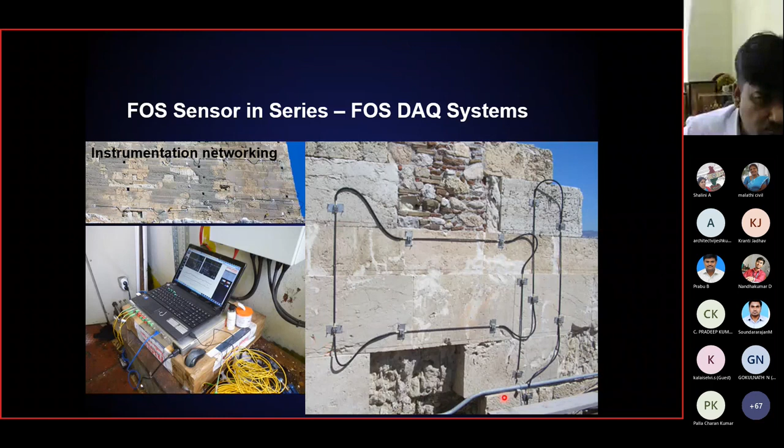So in a small block experiment, you can see how many sensors are put, and you can expect the data to be voluminous. Now we have a data issue.

So the next component that we need to know is data storage. In civil infrastructure we have large infrastructures and the number of sensors is quite huge. Now we have an issue with deployment, which means we have a large amount of data. So we have the largest structures with sensors quite minute, so we may have to have more sensors.

Now, when it comes to analysis of the structure, we need to understand that the changes that happen to the structure are time varying, so continuous monitoring is expected. When you have a large volume of data, that is a deployment density issue. And when you have monitoring over a period of time, 24/7 for many years, about 20 years or maybe 1 year, the amount of data that is going to come is quite large. So therefore you have two reasons related to issues of sensor deployment.

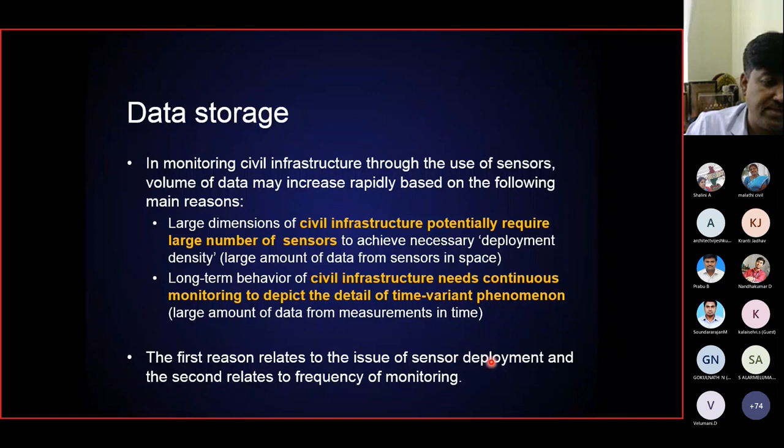The second one is related to frequency of monitoring. You have the sensor deployed onto the structure, and because civil infrastructure is large, you have more sensors, which is the deployment issue. The next one is the frequency of monitoring, so how much data is stored?

If you want a basic idea, any sensor would have a minimum of 3 channels. Let's say you have a sensor of 1 channel, and the maximum bit these days we are using in civil engineering, we are going with a minimum of 8 bit in your lab or 16 bit, but in practice these days they're going even with 32 bit. Let's say we are going with 24 bit, which I was working with in the earlier days.

So data storage is a big issue these days, with offline teaching and online teaching. How much data have you been storing, even the webinars you've been conducting, you've been recording it, and how much data is being stored in your local systems or in the cloud. So the next component is data management.

Although you have all the data stored and everything, you need to manage it. So what is management? You need to have the data, and most of the time you have a data retention policy.

For example, you may have a policy in your college that these recordings will last only for a month, or maybe a year, or this semester. So data retention policies are a critical component of data archiving.

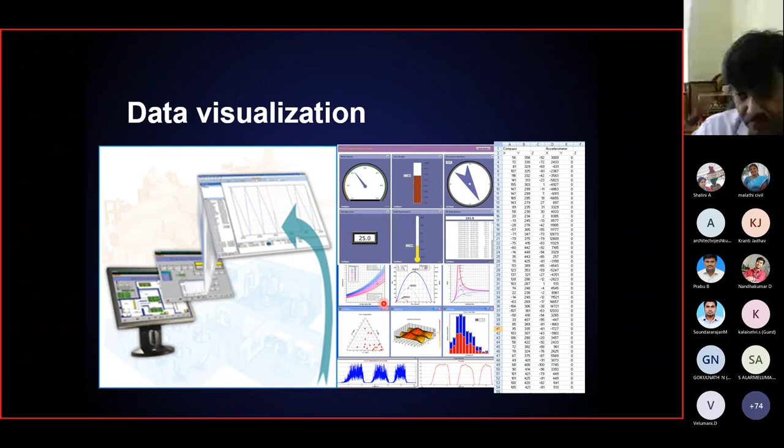So in short, if you have data interpretation and evaluation, let's say you have the structure that has been put with a lot of sensors like temperature sensor, strain sensor, displacement, speed, inclination, and accelerometer.

Once you have got these sensors in place, you have a lot of data coming from them, and what we do is the interpretation of it. By this interpretation, you can have programmed interpretation, that is, you can detect anomalies. You can study what is happening with the sensor, where the sensor is being put. You can do model validation, threshold check, and damage detection also.

This could all be done even using some machines. Then later you pass it on and convert that information. You basically try to do some data analysis on what has already been interpreted in short by these computers, and then you take some action. So this is a basic example of the monitoring scheme.

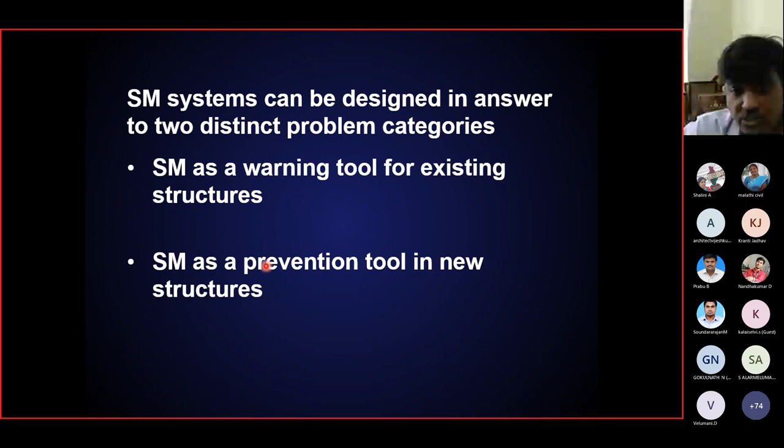The structural monitoring systems can be designed to answer two distinct categories. As I told you, the present day trend in civil engineering is either we have the new structure or we have the old structure. Both are having uncertainties, and we need to look into those uncertainties and develop our understanding of the system. So the structural monitoring system can be designed to answer two distinct problem categories: as a warning tool for the existing structure, as well as a preventive tool in a new structure. This is what we call sustainable development, and this is what is being incorporated.

As you all know, there are a lot of benefits we can go on talking about, but let's cover a few main ones. The development and implementation of the structural monitoring system, although it is capable of fully achieving the objectives and benefits you are looking for, is quite a challenging task. Although you can really do the monitoring, achieving the objective is also quite a challenging task.

We need to have a well coordinated interdisciplinary research for adaptation of innovative technology. Every time there is new innovation, whether a sensor, computation, instrument, or algorithm, we need to plug into it and get the benefit out of our system. So this is basically well coordinated interdisciplinary research, and in order to get the complete benefit, we need a well collaborated system.

But in general, there are various benefits: monitoring reduces uncertainty, as you all know, that is what we are looking for. Monitoring discovers hidden structural reserves. Monitoring discovers deficiency in time and increases safety. Monitoring ensures long-term quality. Monitoring allows structural management, and monitoring increases the knowledge base.

So now we have understood what is structural health monitoring.

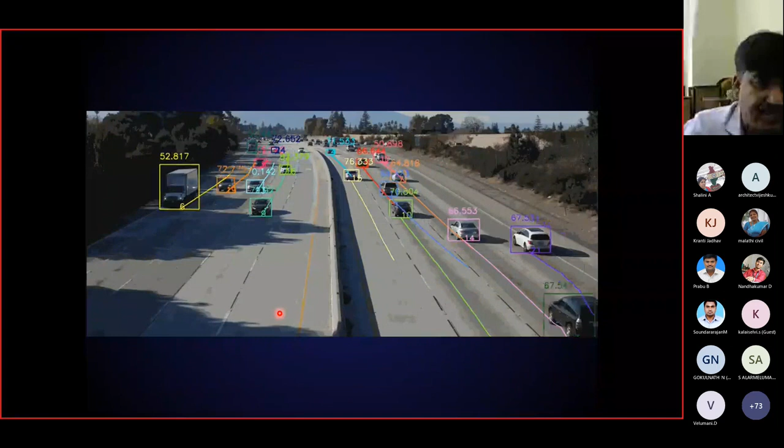Today we are able to implement artificial intelligence and get data from the webcams and IoT devices that are connected. You can get the speed of every vehicle, and we can also do counting, identifying what type of vehicle it is. This is extensively used.

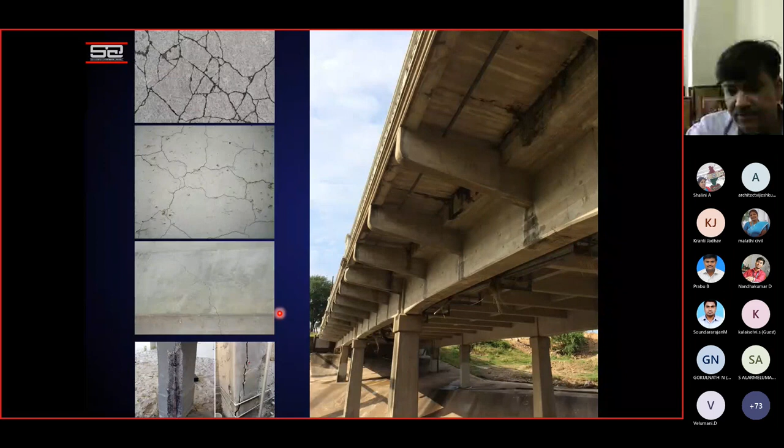The same thing can be implemented on understanding the different types of cracks, and the maturity of concrete is extensively studied by various competitive companies. How the concrete is maturing, you can easily know what is happening.

But there is always a question: will artificial intelligence replace human beings? A simple answer is, just as the calculator didn't replace us even though we've developed so many systems, we're still using the calculator today. So don't think artificial intelligence is going to replace humans, but it's definitely going to simplify repetitive tasks.

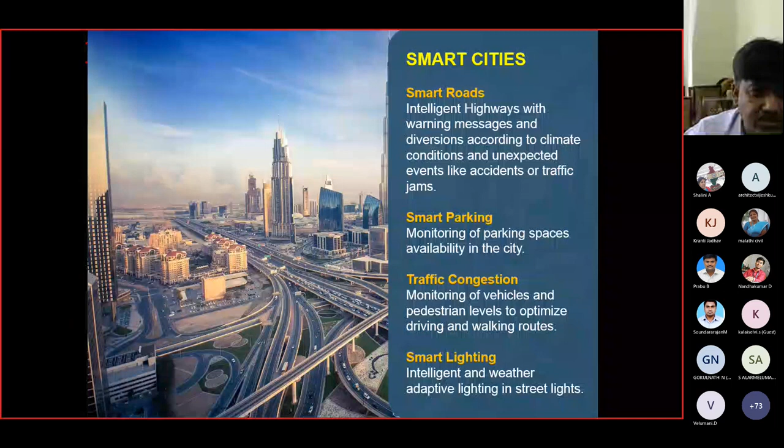So I'll just run through. The application of IoT includes smart cities with various applications, smart environment, smart water, smart metering, industrial control, agriculture, and animal farming.

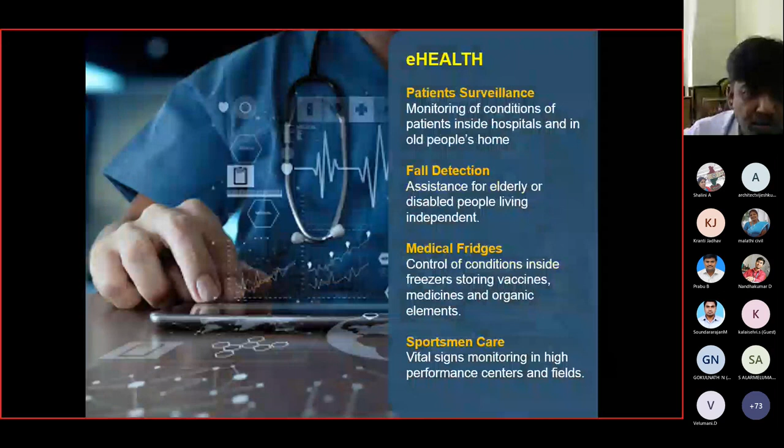Home automation is presently the day's trend and everybody knows about it. E-health after COVID and security issues are also main important things. And if you're doing lots of shopping nowadays, all these things are connected too. There is a wide possibility of application of the IoT system, with endless possibilities.

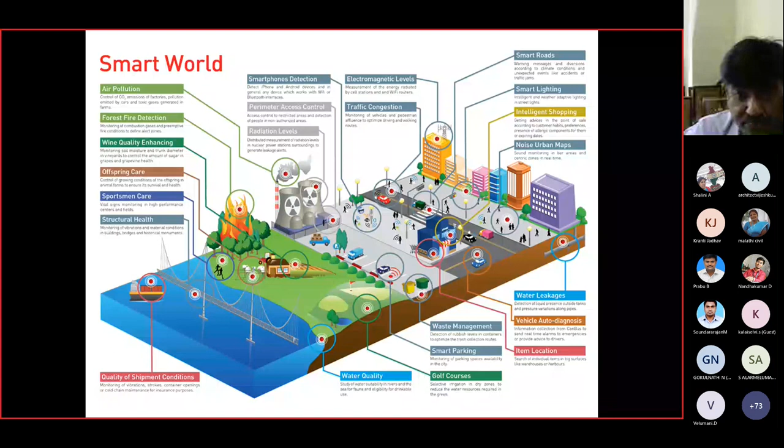We can develop smart cities, that's a present day trend. I would run through this. This is the case study that I wanted to cover, but I will skip these things since I tried to give the basics and build into it.

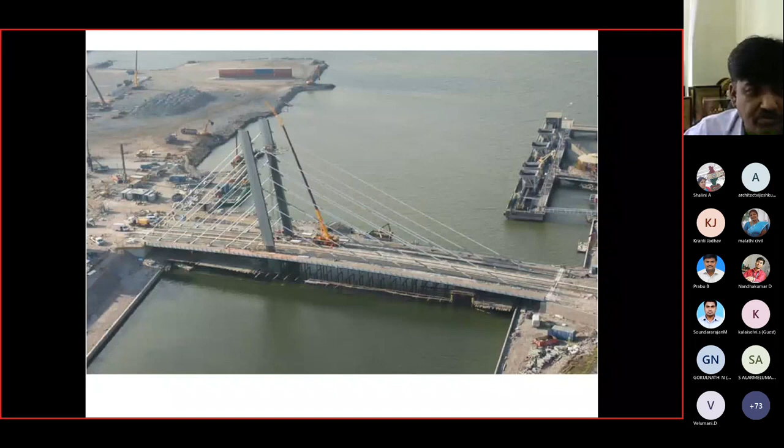I scheduled it for 2 hours, anyway we've cut it short. We lost about half an hour maybe initially, and then I think I mistook it as 2 hours.

Now I would run through the final conclusion. That will be better, I think I'll run through the final conclusion.

Now I would like to conclude this presentation. When it comes to IoT deployment, the rip and replace approach does not work, but it happens in incremental stages.

I wanted to give you some perspective that if you're looking at a previous system already there for monitoring and want to put in IoT, it doesn't mean you rip it off and replace it with new ones, but you go into an incremental phase. There are a lot of issues related to IoT also.

In reality, hardware is only one aspect of IoT success. Most people think that if you have hardware, you can have success of the IoT scheme. It is not so. Your sensors must integrate seamlessly with the digital infrastructure that empowers people as well as systems to operate more productively. Otherwise, the IoT isn't worth the investment. Purchasing high quality IoT sensors and transmitters is only valuable if you can empower people with accurate data that drives business transformation.

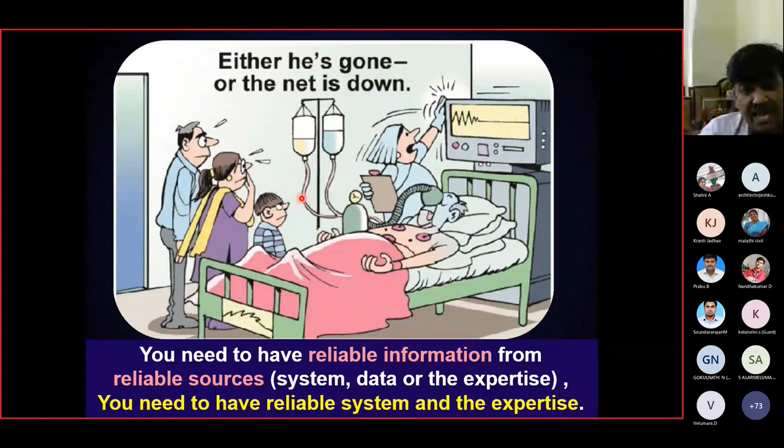You can see the sensors have been providing data, but we don't know - there's an expert here who could have minimum expertise. So we don't know whether the sensors are functioning properly, whether the system's accuracy is fine, or if the interpretation is going wrong, or if the expert itself is wrong. So what we need is reliable information from a reliable source - a reliable system under a reliable expert. That's the whole thing.

So if you want to redefine it, the mission of any technology is to provide as much reliable information as possible in the most complete form, to be used by those who make the decision.

As I said, the Internet of Things, artificial intelligence, BIM - we are at the tip of the iceberg. The future of IoT, AI, and BIM is not limited. The only limitation is your imagination.